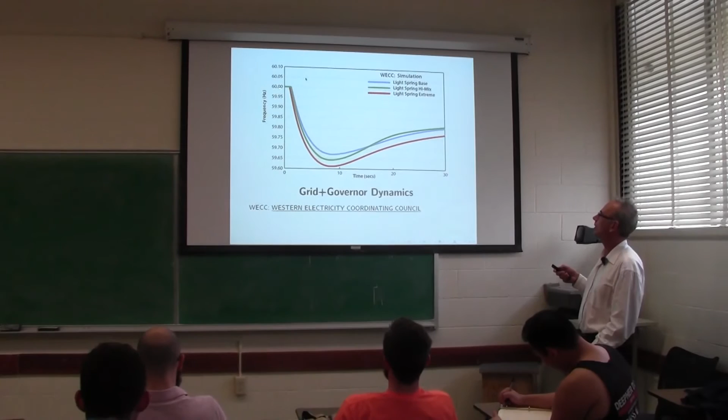And I said, I don't remember what WECC is. I'll look it up for you next time. The Western Electricity Coordinating Council. And I won't say anything more. You can remember, underline means click, and you can read all about it. So if you have insomnia, you can go to that page and read.

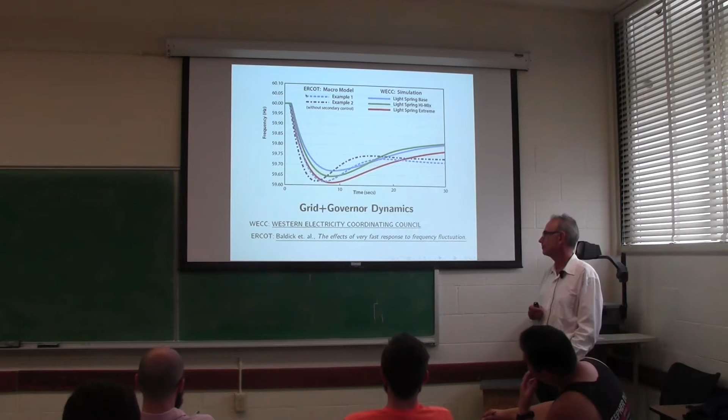And I also showed you this maybe more simplistic model of Texas that was looked at by a really nice paper by Baldick et al., on the effects of very fast response to frequency fluctuations. And it's a paper, actually it would be a good paper to look at for a report. So basically they're looking at the same sort of things I'm looking at in this lecture, given a grid model, what do I do with it in terms of dealing with, controlling the grid.

So let's do it. Okay? And you can click that again and get the paper. Let's do a design. So remember this awful thing. So for this particular paper, I pulled out one of the examples. The example is actually for this more extreme case here, where there's a very fast response time. Whether that's bad enough, we'll see. The fact that it's so lively, so underdamped, looks scary at first, but to a control engineer, we'll discuss that, whether this is a bad thing or not.

And a lot of the Midwest is under PJM. So there's one control center, where they're going and making decisions for the entire fleet, for a quarter of the U.S. And they broadcast this to every single generator. Well, there's some generators that opt out of control, but any generator that will accept a control signal from the balancing authority, that's common to every generator.

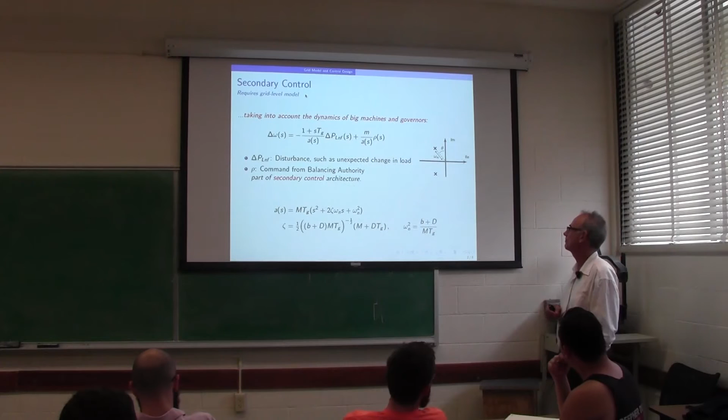And you can approximate A by a second order polynomial. So it's a second order transfer function. So what's A of S? So we derived it. Was it last? No, you were there a week ago. I can't give it to you again, but it's there.

We had B, which was the summation of the reciprocal of those droop parameters, that is the summation of 1 over Ri. And D was the constant for all of these frequency-sensitive loads. TG was the time constant for all these governors, and M was the sum of all of the inertias in the system. So we derived this, and it's very hard to see what the hell that is.

So you've got to look at a numerical example to figure out, is this less than 1? That's when you have underdamped response. Okay, so again, this is a disturbance.

The main thing we'll be talking about in the next lectures is this rho, which is a command from the balancing authority. Roberto, that was your question last time. That's going to be part of the secondary control architecture. So how do we do it?

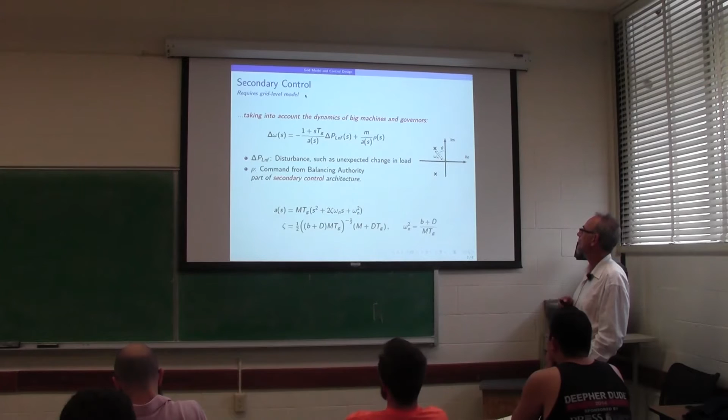Here's the example from this ERCOT study we're going to look at in detail, where they got this disturbance transfer function, and I'm just going to normalize this other transfer function. This is the transfer function from the command input to the frequency deviation, and I'm normalizing it so it has DC gain unity. I can always do that because I can always scale rho, so it's irrelevant, the exact constants.

So this is a case where the damping ratio is 0.6 and the natural frequency is the distance here. When the damping ratio is less than 1, we have this geometry, with theta being this, zeta being the sine of theta as we saw last time, and omega is the distance to the origin. That's an underdamped system, but not very underdamped, so it's not a huge overshoot if you look at it.

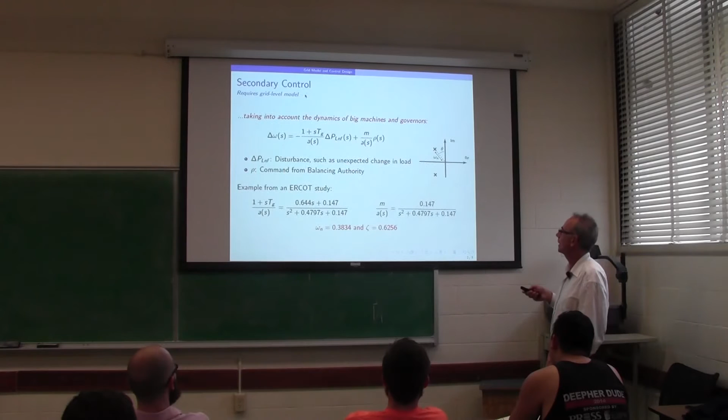And I think that's what I'll write down next. Yeah, so there it is. This is normalized, but I've basically looked at step responses. If you're going to do a control design, you look at various different portraits of the system, and one is a step response. This system has unity gain, so if you put in a step input, its steady state will be unity.

So I basically scaled the step input first to make it negative, so it's like an increase in load or a decrease in generation. I also scaled it so the steady state behavior is the same as the plot I showed you before. But you see that the response to a disturbance has this big undershoot in this case, and a step from the balancing authority doesn't, and that's because this had the zero in the left half plane, which we explained last time.

It causes that more extreme behavior. Well, this doesn't. So that's the first thing: you look at this and you say, well, it's underdamped, but not very much. It doesn't swing around or oscillate, it just comes down a bit. And that blue thing is the thing you use for design. That's all you care about when you do control design.

So the zeros for the disturbance are important, they tell you something. But in terms of getting a control design that is stable, robust to model uncertainty, rejects disturbances in a certain bandwidth, all the goals we talked about last time, it's that blue guy.

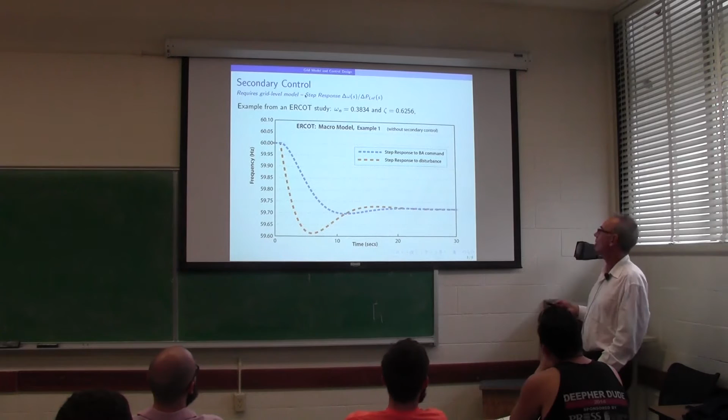Okay, so the next thing you're going to do is this: you're going to go into MATLAB and start to create transfer functions. I want the transfer function for the disturbance, defined right there. I write GPD equals transfer function, and I put in the numerator, there it is, and I put in the denominator. There's a 1, because the coefficient of S squared is 1, there's this 0.4797, and this thing here.

And there you get it. So MATLAB then immediately puts it in the same form that you would have done it in a math program. So that's really, I love you MATLAB. I mean, it's amazing what they did for us. Control, you can't imagine how awful it was to teach control when I started as an assistant professor and there was no computing technology.

There's nothing, you know, you really couldn't tell the difference. You had black boxes, and nobody could tell what was a compensator and what was a plant. And having this is just heaven. So anyway, you do the same thing for the thing you really care about.

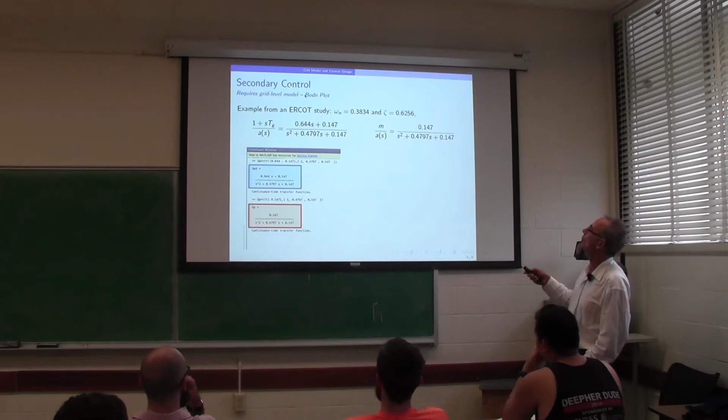Again, this is the transfer function from the balancing authority's command to frequency deviation, and you get these guys, and then you can look at a Bode plot, because that is it. You need to understand a Bode plot for design. Forget anyone in power systems who goes on and on about pole zero plots. For a single input, single output system, it's crazy to look at pole zero plots. And power systems engineers do not know that. They really don't. I've been around them long enough to see they get a different education than people in other disciplines. And here's why.

So basically, you're going to type Bode GP and Bode GPD. There's a hold there that's missing. Figure, then type hold to get two plots on the same page. And you see this resonance up here for the blue guy. The blue guy is the one with the zero, so the zero creates that response. And for this other guy, you see it's more flat, you don't see resonance. And that's the thing you have to stare at when you do design.

Now, why do I dismiss pole zero plots? Because when I look at this, it could be a 5 million order system, with 5 million trillion poles and zeros, but yet I wouldn't give a damn. I could do a design. The complexity of my control design has nothing to do with the complexity of the system. If I do a control design based on poles and zeros, I'm dead if this is complex. I'm completely dead, I don't have any intuition. And the intuition you get from the Bode plot is infinite, while the intuition you get from poles and zeros is really fragile. It's just not useful at all.

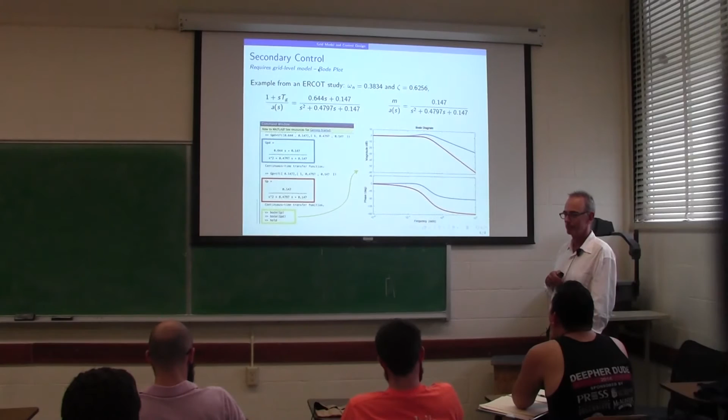So anybody who's not taking control, you're allowed to whine. Tell me to slow down if I need to. Yeah? I want to whine? That's fine so far. Okay, cool.

So here's where I sit down and get to work. First of all, I write down a Bode plot, and I gave myself a lot of room, partly because there'll be a lot of these. We're going to come back to this plot a lot over the next weeks, so it's going to be really useful to illustrate a lot of concepts.

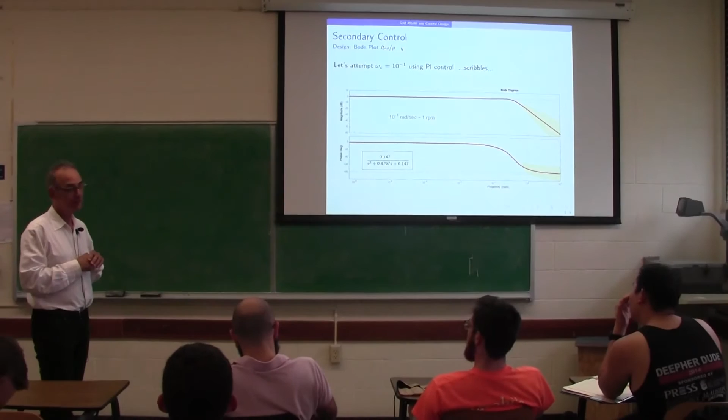But last lecture, I designed a PI compensator, and I ended up designing it so I would have good disturbance rejection over here and basically nowhere else. I had high gain at frequencies down here, but not elsewhere. So we want high gain. The larger the region we have high gain in our compensator, the broader the range we'll have disturbance rejection.

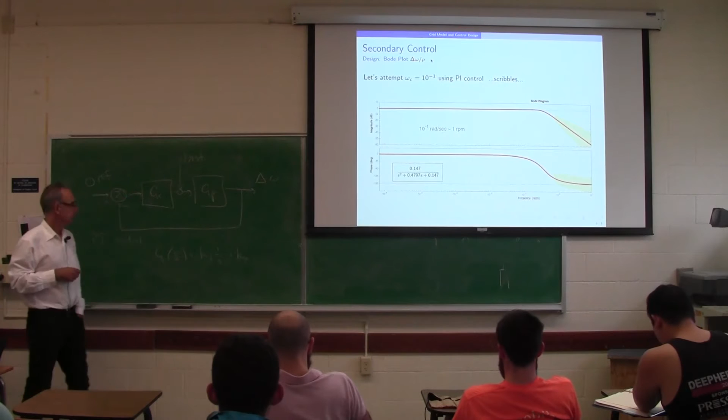So PI control just means, not JWS, it means you have a positive gain times 1 over S. 1 over S corresponds to integration, and then a proportional gain as well. And this is big at DC. When S equals 0, that's DC, and this is infinity. So you get very high gain at DC, and the gain tapers off, because when the frequencies get larger, S is J omega, this thing decays linearly down to 0 on a Bode plot.

So anyway, the first thing you do when you do a control design is you somehow get a Bode plot, and you might do it empirically. You might put sine waves into the system. So I'm the balancing authority, and I'm saying, hey, grid operators, I'm doing a test.

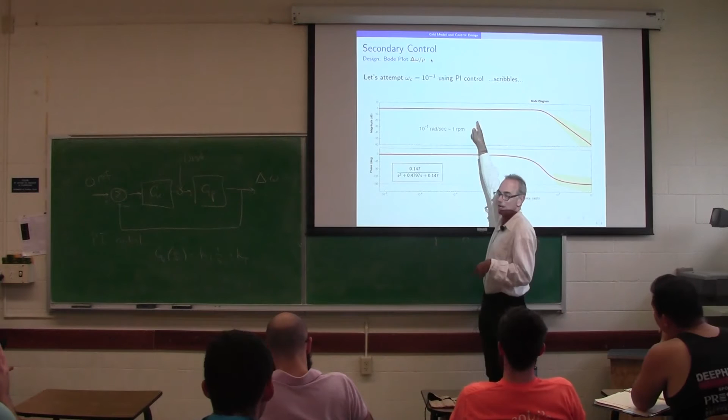I'm going to put in a sine wave of this frequency, then step up the frequency, step it up again, watch the response on the grid, and get a point for phase and magnitude. Do that for several frequencies. You do that in all sorts of applications. I'm not saying they do, but they might.

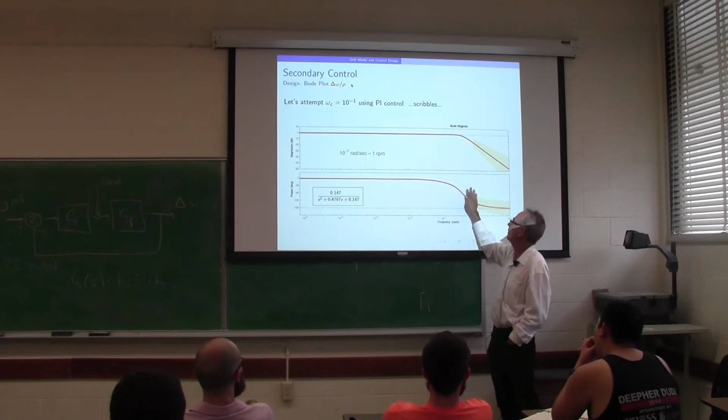After you do that, you'll look at a region like this where you don't know anything. Actually for something like ERCOT, it's bigger than this—a big region where you have a lot of uncertainty in terms of phase and gain. So you've got to identify that, and you don't want high gain there, because if you don't know much about the system, you want to suppress its behavior.

Because I know it's 0, if I multiply this by 0, then it's known. So in this region here I have to worry. Here, take a look, I know that—0 dBs and some constant. I wrote 0 there, whatever it is. That's known, so I can mess around there.

So in a control design, once I understand the system, I'll blast up the gain there and shove down the gain there, and walk away home until I do an experiment—if it didn't work because I forgot about something. But anyway, this is a first step.

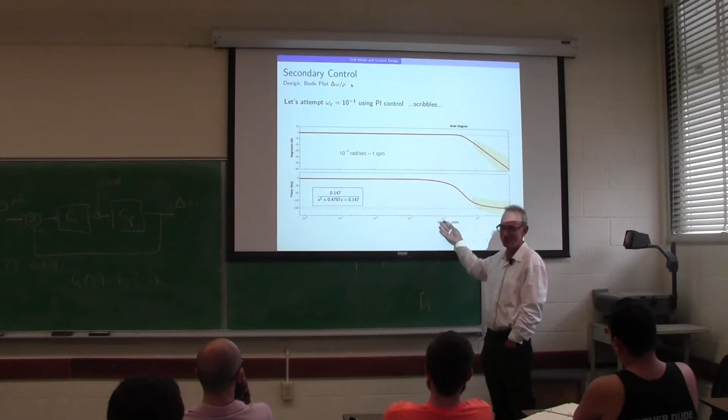So, I'm scared. I didn't want to do that. All right, so let's do this. Let's do a design.

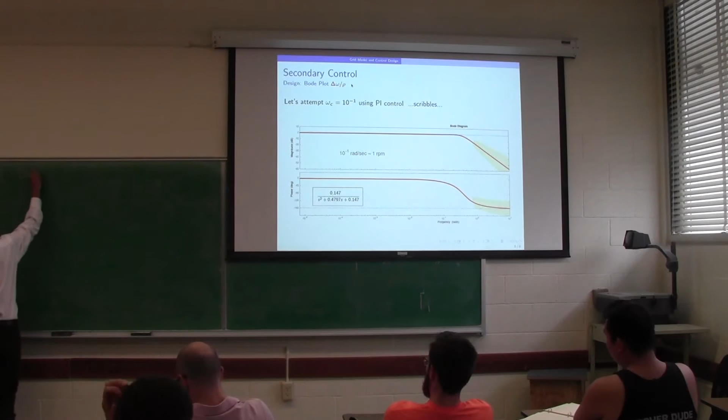Okay, I'm just writing down what I wrote before, and I want to write down a Bode plot of a PI compensator.

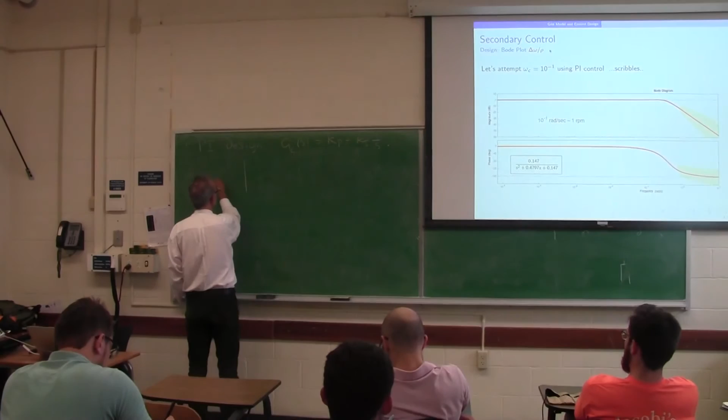Okay, so it shoots down linearly. I said this last time, but it's worth saying twice: for when s, which is j omega, is very small, this thing is huge—it completely dominates, and you're basically looking at just the integral term. A Bode plot of 1 over s is just minus a Bode plot of s; it goes down linearly, minus 20 dBs per decade.

If you don't know what that means, don't worry about it. At some point it flattens out, and that point is a zero location—when this is equal to 0. You have to rationalize this, and that's minus kI over kp, I think, with s on the top and bottom.

It's when this thing is 0. I'll let you work it out—if I'm wrong, don't tell me, I don't care, it doesn't matter. There's a place where that transfer function is 0, and there it is. I know that's right. Okay, so that's a Bode plot.

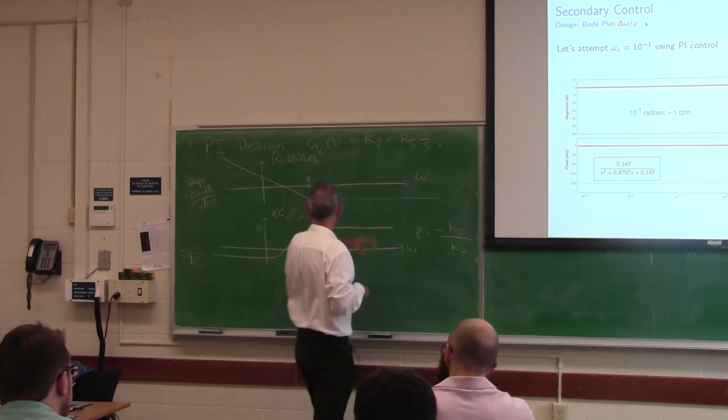And the scary thing about PI compensators is right here: this dividing by s—forget the kp for a moment—when 1 over j omega is just minus j over omega, that's why the phase of minus j is minus 90 degrees. That's why you get that. Phase lag is what we worry about; phase lag is like delay.

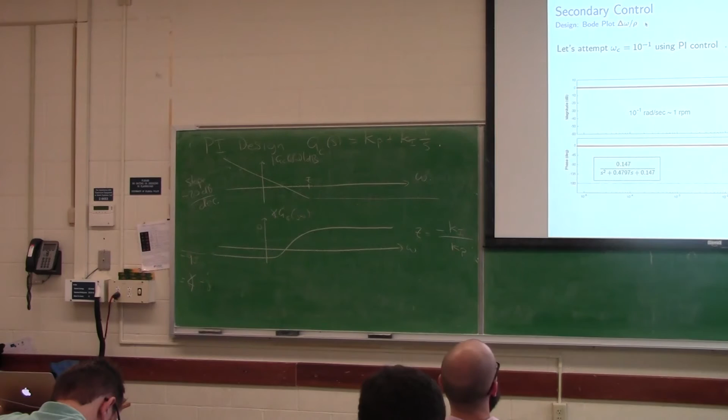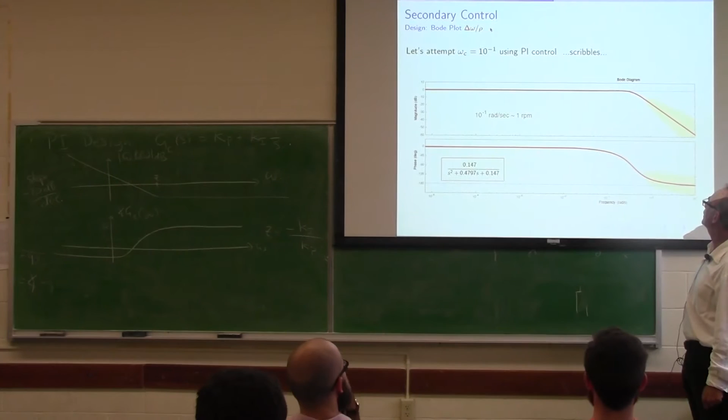So that's where the phase lag here is unfortunate. We don't want this zero to interfere, we don't want this phase lag to get us into trouble possibly over here—unless we've suppressed this enough that it doesn't matter. So it depends on your design. Let's just do a conservative design: if you suppress that enough, you'd still have the phase lag, but it wouldn't have enough of an effect on your system.

Well, we can make this really precise. So it's that thing—well, we'll have to go. I'm going to go back and review phase and gain margins in a moment.

So another thing is that we're going to presume we have a stable system to begin with. As I discussed last time, as we slowly perturb the system, the stability remains—stability is a continuous operation. So if I have a Bode plot and I perturb it a little bit, the system is still stable. I said this last time, but I'll do it again.

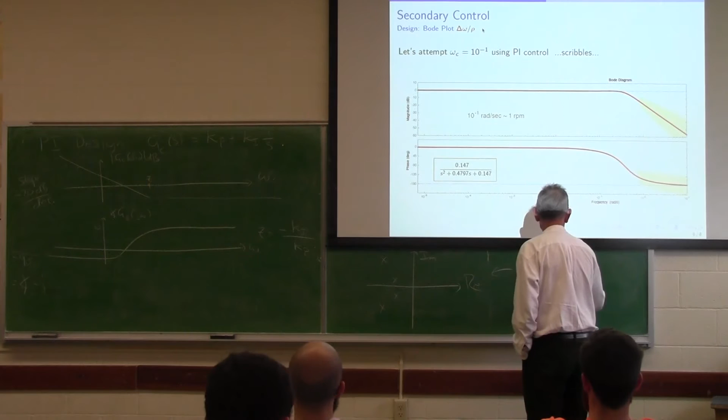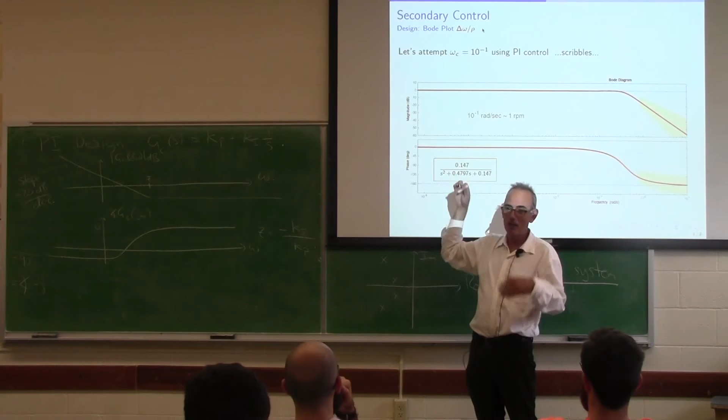So stable means my poles are in the left-half plane for the overall system—for the feedback loop, that's what we need for stability. Now, as I perturb this Bode plot through design, I'm going to add a PI compensator and move this Bode plot around. The closed-loop poles will move and change around. As I crank up some gain or move some parameter, the poles will move slowly, continuously, and the very first time I get into trouble, I'll have poles on the imaginary axis.

Because the poles move continuously, that's why the imaginary axis is so important. It's a boundary between stability and instability. So I want to make sure my poles are far away from the imaginary axis, and I'll review how we think about that in a moment.

So I'm only going to do one design. I'm going to do a really conservative design. First I'm going to note that 10 to the minus 1 radians per second.

I was playing around with this last night, trying to get some intuition for it. It's one cycle, one round per minute, so it takes a minute for one cycle. It's a sine wave that has a period of 1 minute. Now that's pretty much like the highest frequencies that the balancing authority cares about.

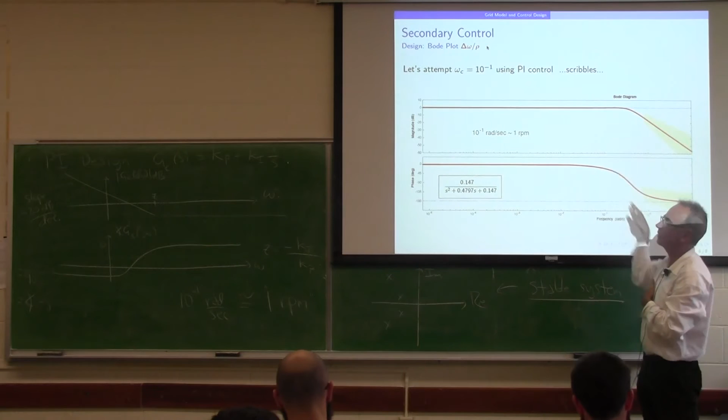Well, it's already going low, but I can get away with murder. I could just use an integral control. Make it easier on myself. And it's got what's called a crossover frequency for all values of the gain, it looks like. Here's the control design.

Well, actually, it's a second design. I did some crappy design last time. This is a little better. It's not great, but a bit better.

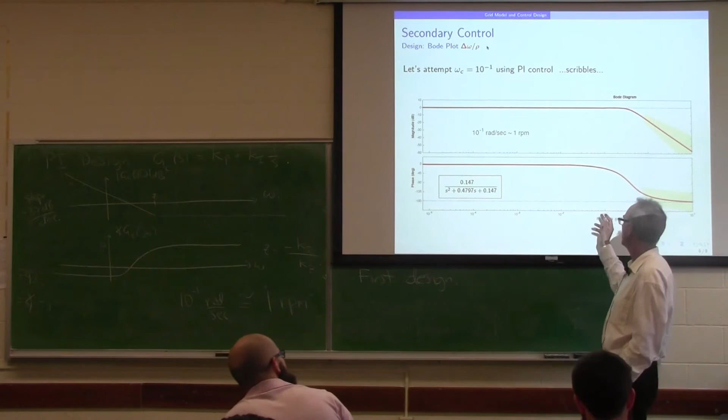So my first design is I'm going to set the crossover frequency to that value. I'll remind you what that is in a moment, okay? And make sure that I have reasonable phase and gain margins, and I'll define that as well.

So to remind you of what these things mean, I've got one, two, three bits of jargon there. I'm going to have to go through, and I need pictures. I can't do this by definition, I can do this on the blackboard. But the main idea is this: I'm going to get rid of the phase for a moment.

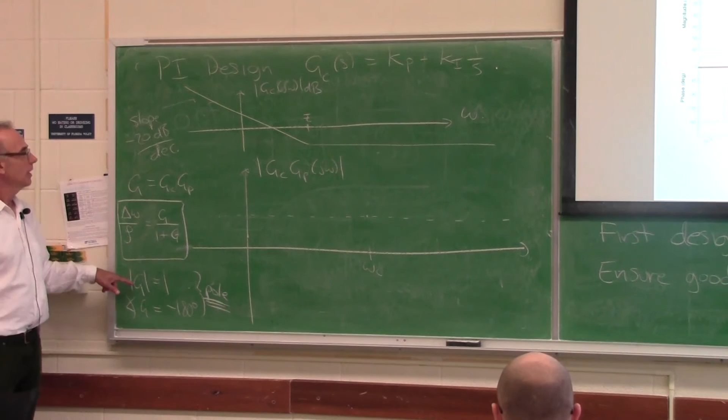And those are the two things you see in a Bode plot. You can see that's the absolute magnitude, not in dBs. In dBs that means 0. So you look at this value of 0. That's a crucial point, because if the magnitude is 1 or 0 in dBs, and you find that the phase is -180, you have a pretty bad design.

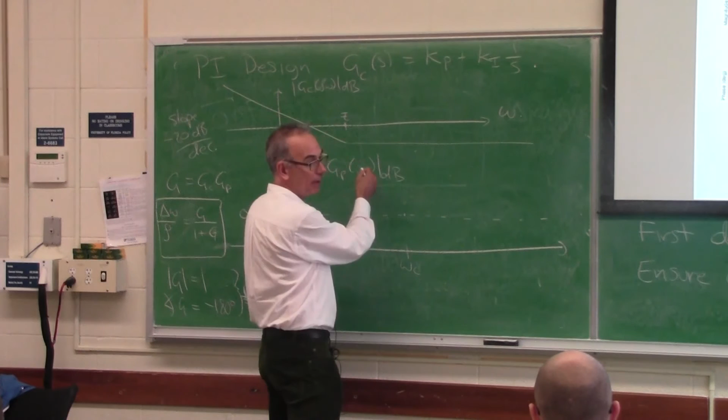All right, so anyway, any design is going to look like that. Any design. So if somebody has done a control design and you want to ask them, what's your Bode plot of the open loop system? It's called a loop transfer function. Once you've told your crossover frequency, there's a Bode plot. I designed it that way. I designed it so it's unity gain here, which means 0 dB, and I decided it goes down. Do you all know why it goes down?

It was our original control objective. High gain. Yeah, okay. I mean, we know over here we're going to have high gain. So I could fill in that Bode plot too: high gain over here, and lower, or moderate gain over here.

So you could say, well, why not have it go down and come up again? Well, then I get another crossover frequency. I want one crossover frequency, because here's where the danger lies. I can get into real problems with stability if I don't have things really under control here.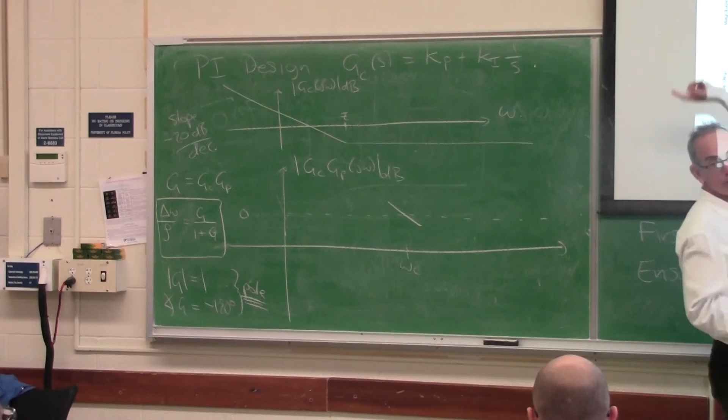And so the original system, we know that the plant is flat. The gain is just flat for low frequencies. And I know that this thing has just a linear slope. So you can guess that my design is just going to keep going. So there it is, you know what I mean?

And at some point, what's that? Slope also negative 20 dB per decade. Yeah, the same slope, right? Because when you multiply transfer functions together and you look at the magnitude in dBs, you sum the Bode plots.

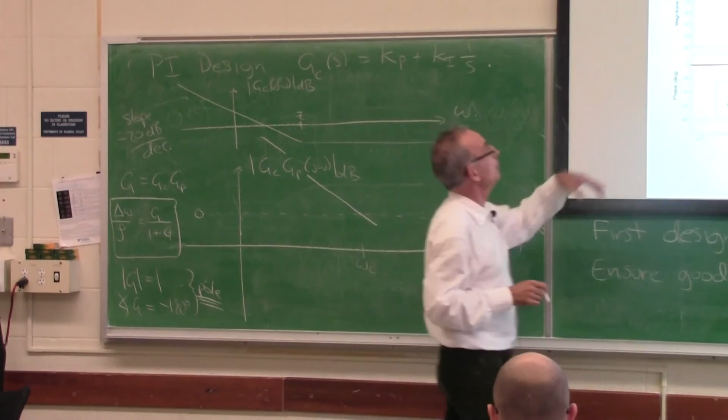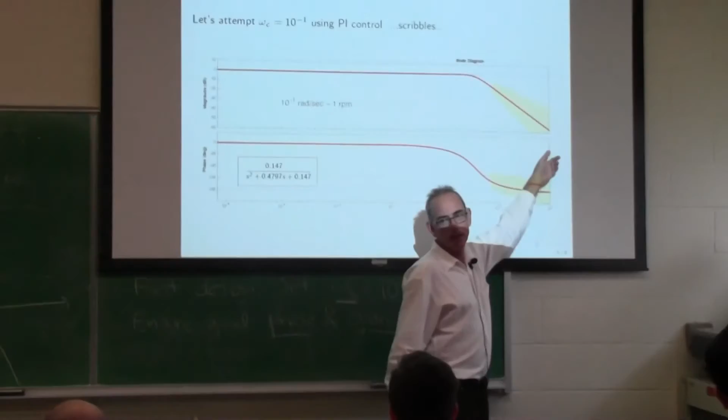And this thing has been normalized to be 0. It's a constant. So all we're seeing for low frequencies is the compensator, which has a slope of minus 20 dBs per decade. Right? Cool? All right. Okay, and then, when you look at this, well, it's going to go down further at some point because the plant does. Well, it looks like maybe we can just get away with murder. Let's just use integral control. Let's forget about the zero altogether and try it out.

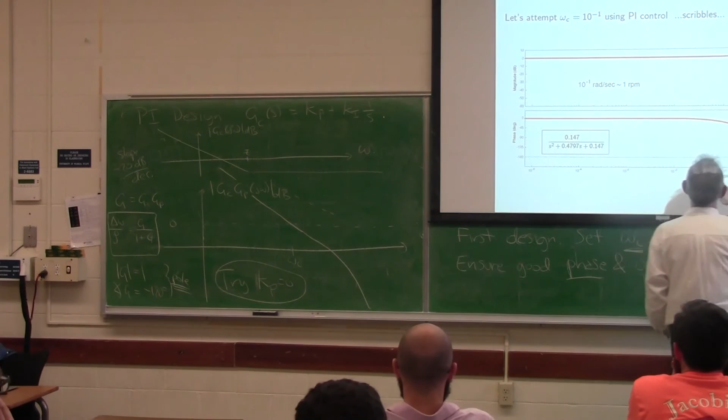It's the first step, okay? So it makes things easier. If we just forget about that, because it looks like with this design we can get away with it. We're going to introduce 90 degrees of phase lag, right? That's what I told you. I told you that the frequency plot is minus 90 degrees. But is that going to be so bad? I mean, we're...

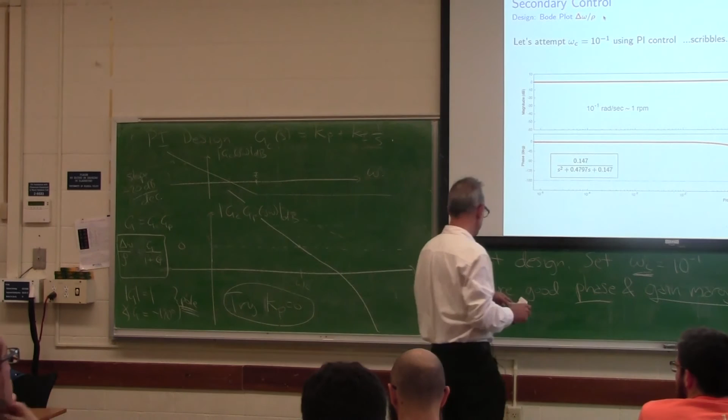Zero there for the product. So we're going to set this. This will check through plots in a moment. I'll define what phase and gain margin is in plots in a moment. But we need...

Okay, so we need the product to have zero in dBs. We need the product to have zero, unity gain at the crossover frequency. Again, I chose this example so that it would be easy. The plant already has unity gain at that frequency. I'll put an approximation there. It's maybe not exactly true, but... And again, through this very, very simple controller, it's just Ki over s.

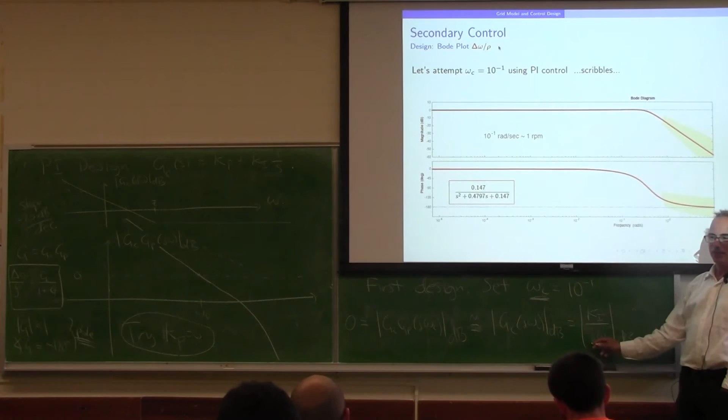Well, guess what? The magnitude of J is unity. That doesn't matter. And so I want Ki to be equal to omega C. Done. So there it is. There's our design.

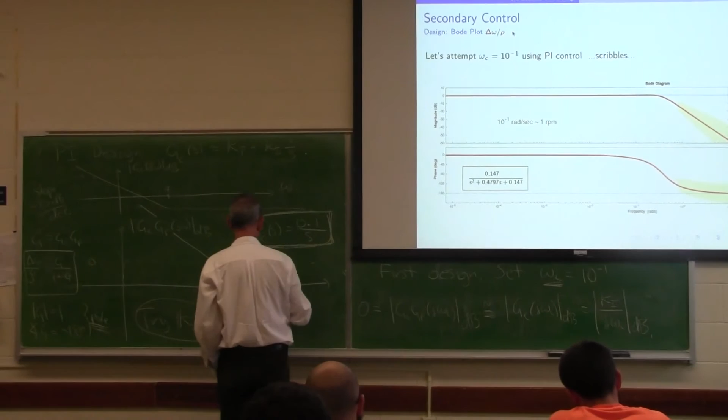All right, let's analyze it. Let's go to MATLAB and type in numbers and see what happens. Is that clear? All right, my only objective is to make sure that I have set the crossover frequency as desired. And when you look at this, obviously these two things have to be the same. So it makes it really easy. Questions?

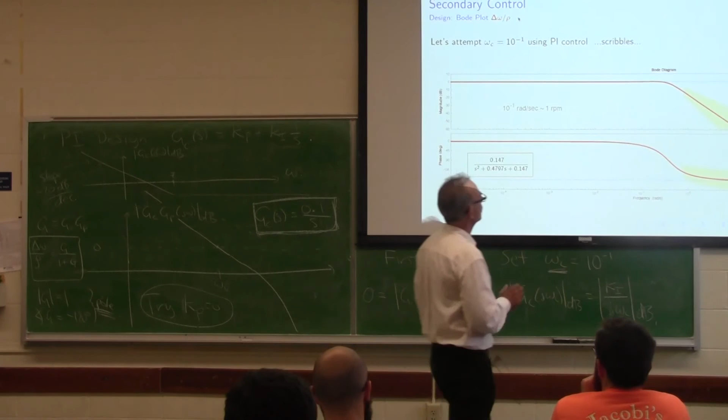How did you make this approximation? Well, it's actually, if you look at this right here, we're looking at omega equals 0.1, right? And just check it out. If I go up and look at that, that's 0 dBs already, which means unity. Okay, so this is 1 already. Yeah, you derived that from the plot. Just from the plot. Yeah, absolutely.

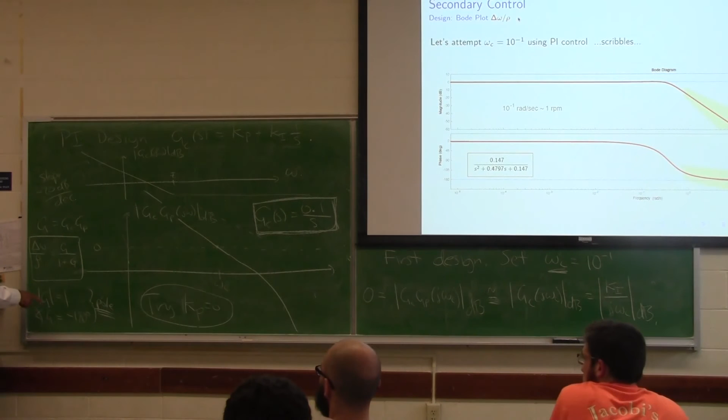All right. So there's the design. As I told you, we've done some damage to the phase because I just use integral control. I'm adding negative 90 degrees everywhere, and so the phase, which was going down to minus 180, now goes to minus 270.

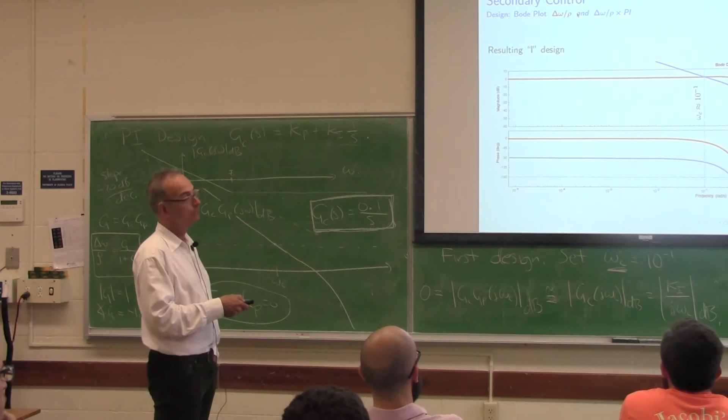But I also, this is my plant. I also added on a straight line. The fact that it's integral control means this just keeps going down forever. So I've suppressed higher frequencies even more. So while before the gain was going down considerably, now it's shooting down much faster. So where that uncertainty lies, it's been flattened to death. 20 dBs isn't that much, but at least it's small. Okay, so that's what it looks like in the blue curve. Again, this is my design. It's the transfer function from balancing authority to frequency deviation times my PI, actually just I controller.

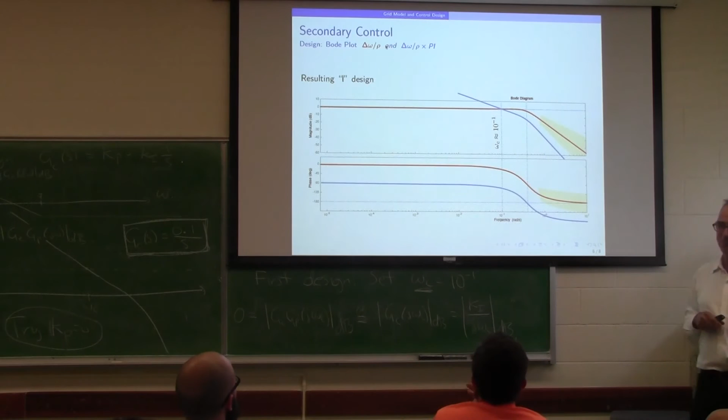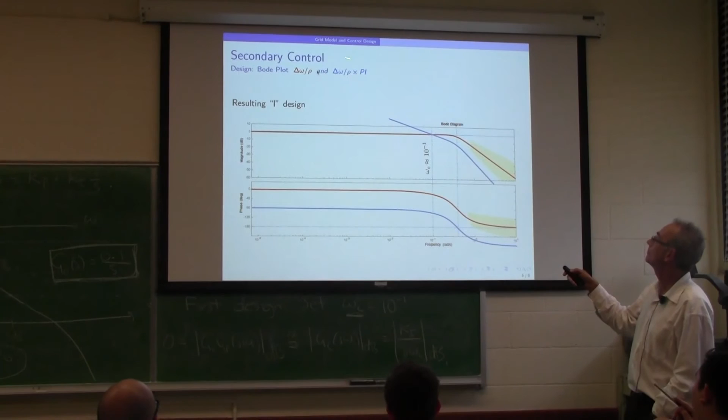All right. What you really do is this. Can you go back to that? Yeah, so the blue line is your design, right? Yeah. So why is the approximate phase at negative 90? Remember, I've erased it now, but remember for the integral controller, we had this: the magnitude was decreasing, but the phase was minus 90.

The PI control, the PI compensator, the PI compensator has this. PI compensator is a flat minus 90 forever, if it's just I, if it's just integral control.

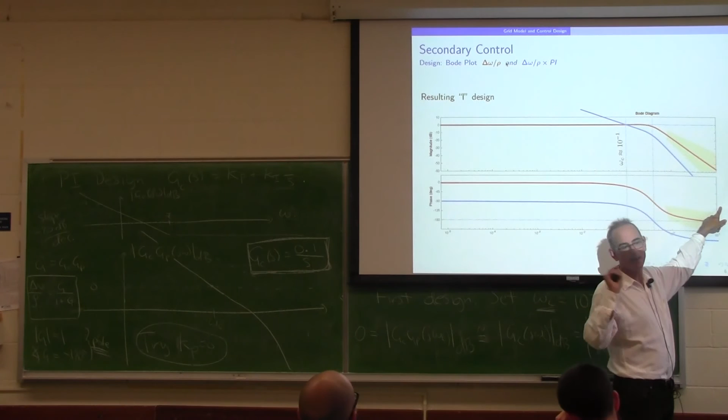So how did you calculate the dip? Is that just from MATLAB? Okay, in fact, I'm going to show you the commands in a moment. Yeah, so Bode in MATLAB gives this to you. So then between the... but this is just a constant offset. I could have done this just with an arts program by moving it down 90 degrees, because I'm just... yeah. But okay, so then in the region for the magnitude, the slope of that's also...

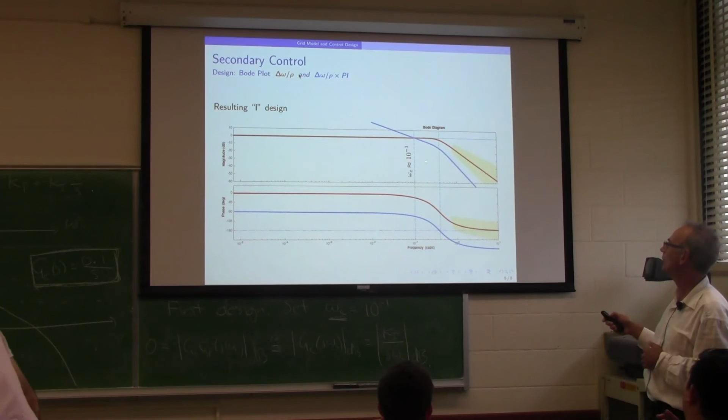Oh, no, I understand that part. Because you want to lower the gain for the uncertainty. But between the region, between the dotted lines, that's... Well, I can explain that in a moment. No, between the... well, that's because it's... this is just you take a...

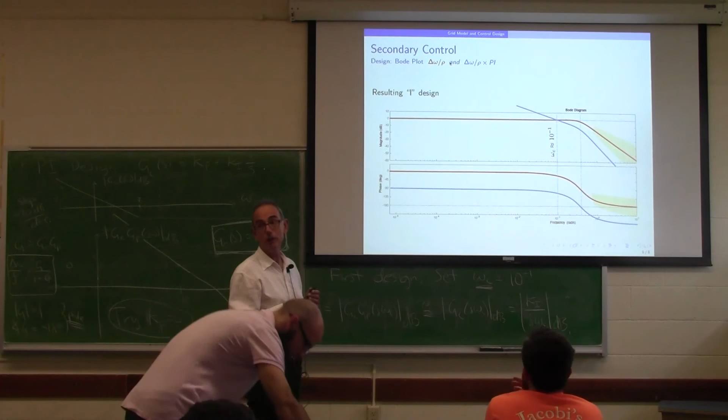When you add on this Bode plot, which is just a straight line minus 20 dBs per decade, and you add that to the red curve, you get the blue curve. The blue is the product of the two transfer functions. The blue is G.

The beauty of dBs is you add the Bode plots. So if I take this red curve and add a straight line, I get something with slope minus 20 dBs per decade there. And out here it's minus 60 because the plant itself already had minus 40 dBs per decade. So the slope of that line up to that point is negative 20 dBs, then it goes down minus 20 dBs. Something funky happens here, and eventually it goes down minus 60 dBs because you've got 3 poles and no zeros.

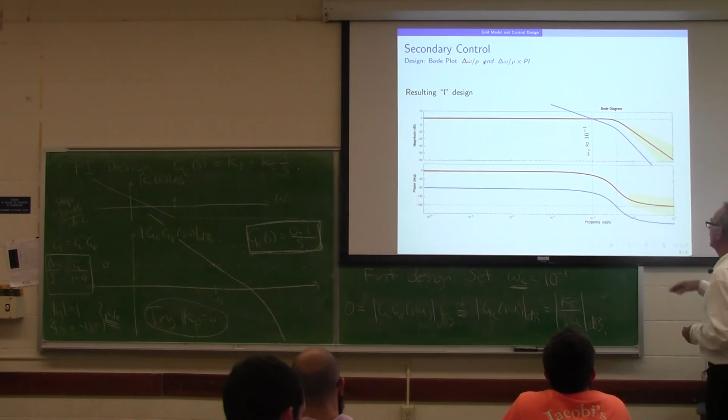And if I'd used PI, the phase would have eventually recovered here, and the slopes would have been the same at high frequencies. But I don't care about super high frequencies anyway. To me, minus 80, minus 60 dBs, that's 0. In my world, that's 0. Not to a physicist, but to a control engineer, that's 0.

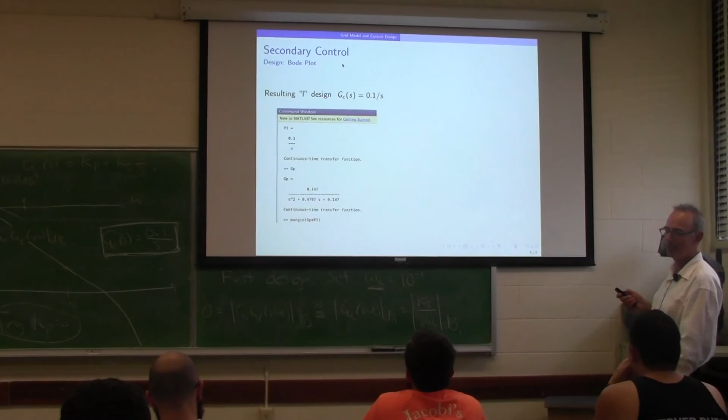Okay, so here's what you do in MATLAB. You go in, and you'll see some funny things. You can look inside my life last night if you stare at these screenshots carefully.

Not this one, but I did the same thing. Designed the PI compensator. We already defined the plant transfer function, and then you can type margin in MATLAB.

So margin is a really useful command. You type margin, and you get what I just showed you. But now let's slow down on this, it's really important. First of all, 10 to the minus 1, that was my crossover frequency that I designed. You can see MATLAB agrees. MATLAB says, good job.

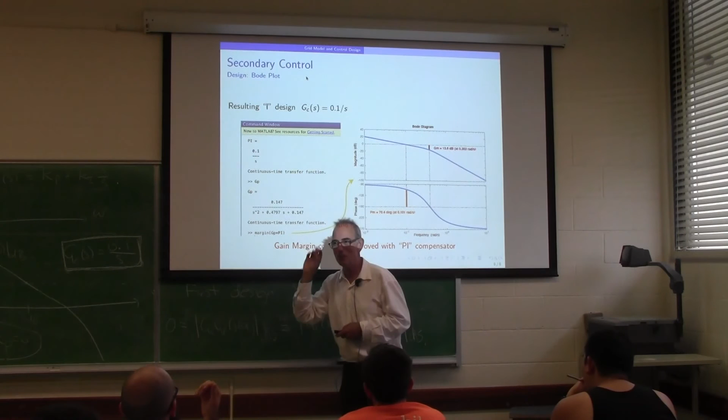It's telling me, well, I was off by a bit. It's telling me the crossover frequency is at 0.101. This is just... wait, so what is this margin value? The dashed line that MATLAB gives you from this command is the crossover frequency, and you can see that I'm off a little bit because I had an approximation right there. This wasn't exactly unity. I was off by 10 to the minus 3, but big deal.

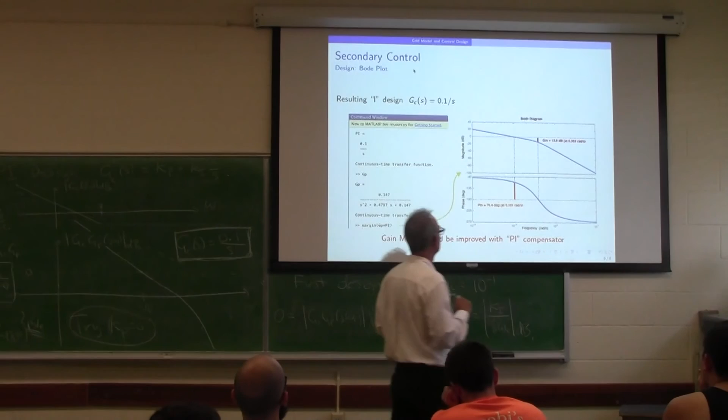Now the phase margin is how far I am away from this scary minus 180. If this thing wasn't there, I'd have a pole exactly on the imaginary axis at this frequency, because I would have phase minus 180 and a gain of 1 at a value j omega. That's bad, I've got a pole on the imaginary axis. So this is very nice, it says what I said I was going to do. I made sure I had a really big phase margin.

So how does it know to check it at 0.101 radians? It checks where the gain is unity. That's the definition of phase margin: you look at your loop transfer function G, you look at where it's magnitude 0 dBs, and you check the phase, and see how far you are away from minus 180. The farther you are, it's a big measure of robustness.

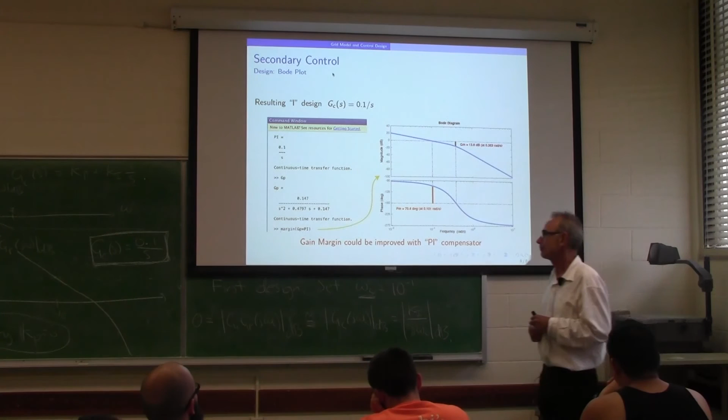But it's a lopsided view, because this is also important: you look at the frequency where the phase is minus 180. The margin command does that as well. It goes over and says there's a frequency where the phase is minus 180, and it turns out to be at 0.383 radians per second.

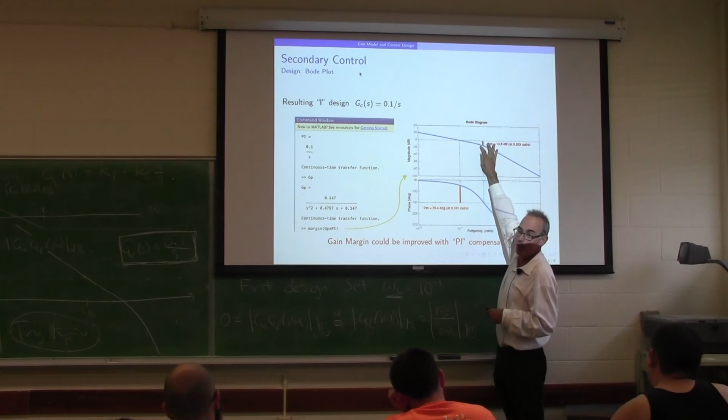And then it goes up and says, how far am I away from being 0 dBs? And unfortunately, 13 is okay, 13 dBs is the distance, but not as good as I'd like. I don't know what 13 dBs is exactly, maybe 7. So if I cranked up my gain by 7, maybe it's a bit less than that.

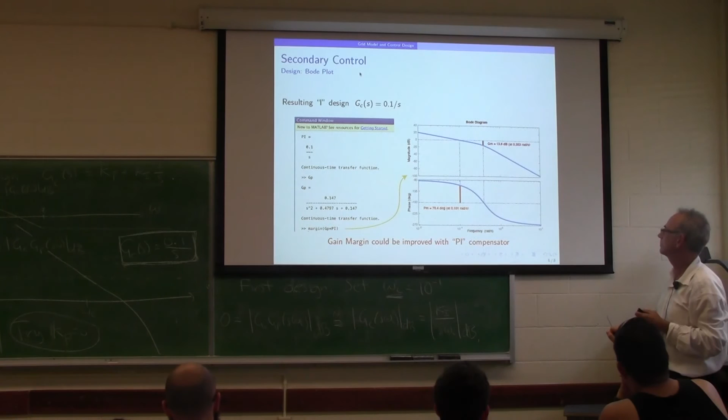We'll see. Do you want like a gain close to 0 or close to 1? No, what do you mean by that? You want to keep... here's the gain, I mean the gain is, what do you mean? It's saying at that frequency, the gain margin is 13.6, but you want the gain margin to be as close to 0 as possible. No, infinity.

Now, remember what we're talking about. Here's my closed loop system. Oh, you want it smaller. Yeah, and a pole is when G equals minus 1, so magnitude is 1 or 0 dBs, and the phase is 180. I sure as hell don't want a pole on the imaginary axis.

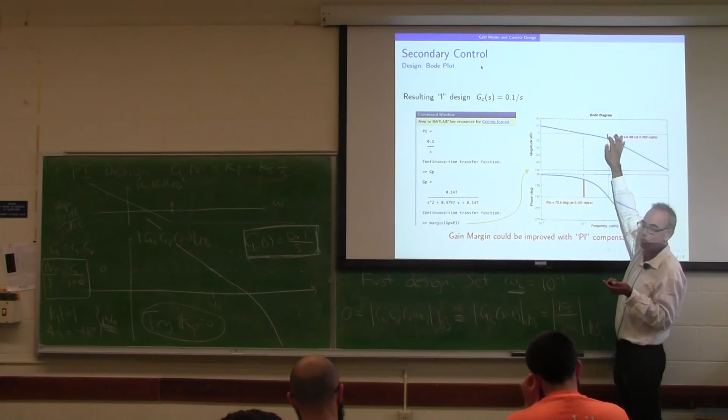And the farther, I want my poles to be far from the imaginary axis. At negative 180, you want it as big as possible. I want this to be far. So this says I could perturb the system a little bit—I mean, 13 dBs is not small, but I could perturb it a bit and get a pole exactly on the imaginary axis. If I perturb it a bit more, I get poles in the right half plane. So no matter what, it's unstable. That's my margin to uncertainty there, and I don't like it.

And I think the book's wrong. I don't believe that they just use integral control. I just don't believe it. I've tried—I have friends at ISOs. They won't talk. It's so hard to talk to people in the control room, because there's a lot of 'their daddy did it.' There's sort of dogma passed down, and there's a lot of hacks that go on. So people don't really want to talk. It's hard to get to the inside.

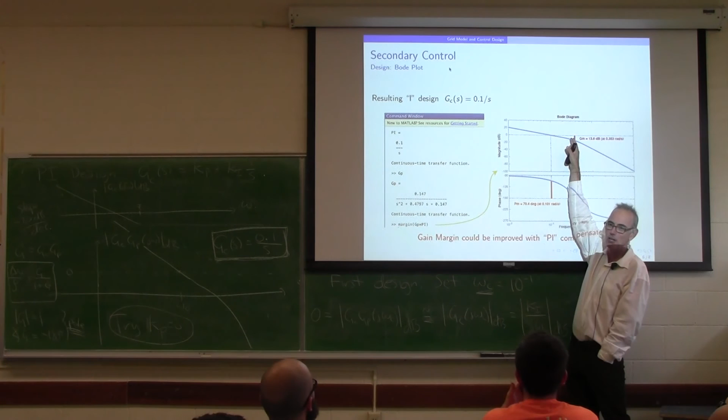So anyway, I think that if I was actually put to work on this, I probably would use PI control, and I'd do some more things as well. I'd have to find out how much uncertainty there really is in this region, and based on that, I could refine the design and get a better gain margin, and maybe get this crossover frequency more to the right. Because as we're going to see, we don't really have enough bandwidth to make PJM happy or ERCOT.

It's actually the design does not have high enough gain at the frequencies I care about. Wouldn't you want the gain to be 1 at lower frequencies? No, I want massive gain. Oh, to the phase margin? No. So you can have the phase margin—no. Remember my goal: I want to reject disturbances. So I need GC big to reject disturbances.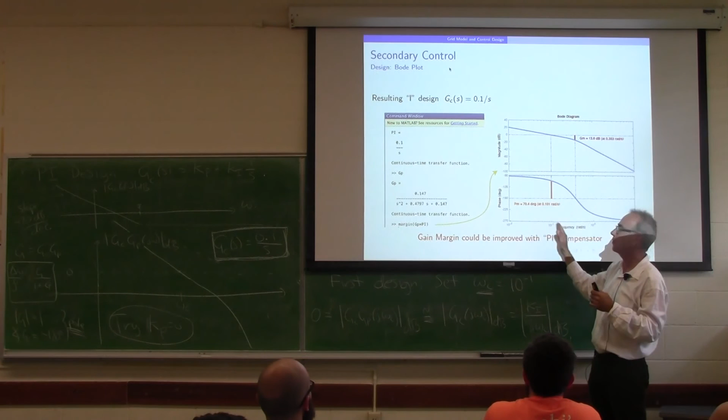So ideally, for disturbance rejection, I want that crossover frequency to be way over here to the right, if I want to reject a huge range of disturbances. If I'm completely terrified of stability, I want to move this way to the left, maybe, because then I'll have huge gain margin and phase margin. But you could be more delicate and try to shape the Bode plot to push this as far as you can while maintaining reasonable gain and phase margin. And that's a big job.

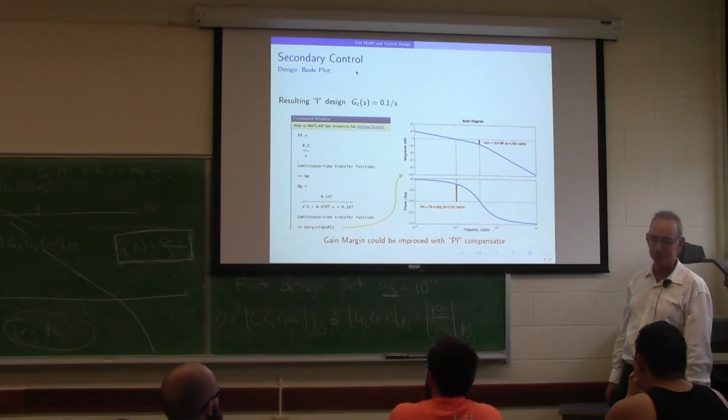You might have a fairly complicated controller. It'll probably be a combination of PI and what's called a lead controller. That's probably what I would use. But that's a control course—you'd have to take a whole course. But at least it's enough to get you ideas. Is that clear, though? We've got these two competing objectives, trying to push out disturbances but also have stability. Naturally, those are conflicting.

All right, so there's the whole thing. Here's actually what the whole diagram would look like. This is just another way of expressing what we had before. I've broken up—you notice I've got an sTg plus 1 and sTg plus 1 there. Those cancel out: the dynamics from the balancing authority to the deviation in frequency, and grid disturbance to this had that zero. So this is just a nice way of expressing everything. And we designed this compensator. The reference signal again is 0 because we would like to regulate it to 0. And we came up with this very cheap design, something you could do in 15 minutes. All right, and so those are the things we use. I'm just reminding you—so, there it is.

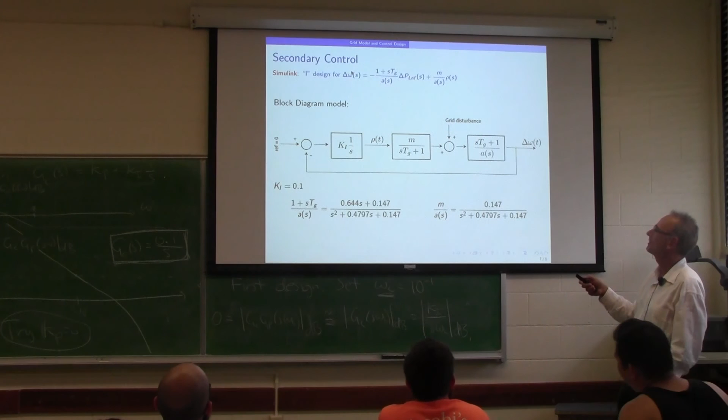I want to show you this beautiful gift from God, meaning MATLAB, called Simulink, and show you how you can play with it. So I sent you this today.

So MATLAB lets you just drag and drop transfer functions. There's the grid, there's my compensator, there's noise from nature. And you can actually get noise from nature - you can have it input samples of noise from solar or wind or whatever you like. And there's a scope and so forth.

So it takes about 10 minutes to do this. And here's where you can really start laughing at me - like, that's 10:47 p.m. last night, and my battery power looks like it's 50%.

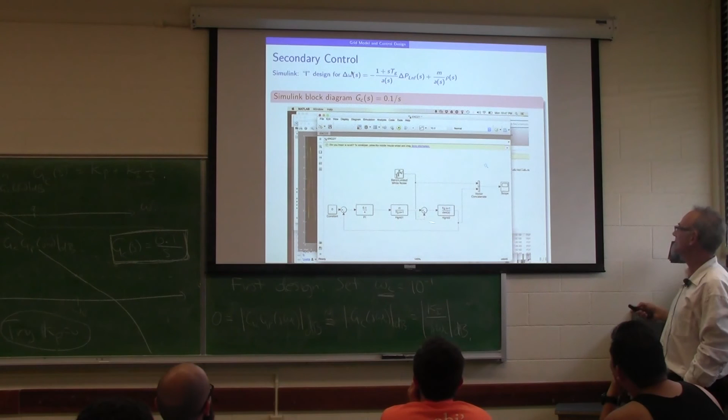All right, so there it is. And I had a lot of trouble with this because I was trying to shape the noise so it's consistent with what you would see at PJM, and I kind of failed. Anyway, this is just 10 seconds, so the variability of noise is really not that great - this is higher frequency than you'd see in real life. The red is the disturbance, and the blue is my frequency deviation. You can see I'm not doing that great a job, but I'm canceling out a lot of that red stuff, though there's still a lot of blue left over.

So what about cranking up the gain to 10? It was 0.1 - what about 10? And it goes, this is 6 seconds, it goes wham, and it just blows up. So it's totally unstable. So definitely the gain margin is less than 10.

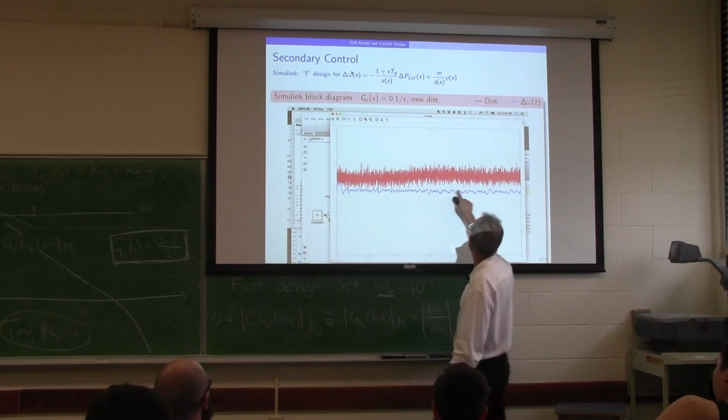Here's a more realistic experiment, not in terms of frequency content, but one of our goals was really rejecting really low frequency disturbances. Here's a disturbance with a constant value 1 included, so that could be 100 megawatts if you like, and it's positive, meaning you've got 100 megawatts of extra generation, a generator turned on and stayed on. It's not very realistic, but you see, because of the startup, you get a big transient in the frequency, but then it settles down, and you reject the DC component of the disturbance perfectly, but you're letting a lot of the high frequency stuff come in - that's about a minute and a half, 100 seconds.

That's way too much, so this design - there's not enough bandwidth in this controller. It should have a higher gain over a larger frequency range to be able to knock down the higher frequency part, right? And here's where things get really depressing.

Shall I? Oh, that's 5. That's a mistake. Oh wait, I better double check - I have to check my code. Now I'm not sure, it says 5 there, but I think it's only 0.5. I think that's a typo. I'll correct and get back to you.

I wanted to see numerically where the system would become unstable. It wasn't 5, it was 0.5. So my gain margin is only 5, or less than 5. I'll double check - this could be wrong, but you see that oscillatory behavior. We've got poles in the right half plane, but very close to the imaginary axis, so that's a bad design - a really bad design, where by increasing the gain, I end up moving the crossover frequency, and so I end up in an area with a lot of phase lag. It wouldn't be unstable if we weren't doing so much damage with integral control - we're introducing all this phase lag, which we don't need.

Doesn't 5 make sense though? Because this is in dB, right? No, because I went from 0.1 to 5. Oh yeah, 0.5 would make 0.6, something like that would make sense. Yeah, so I'm pretty sure it was 0.5. I'll go check my code.

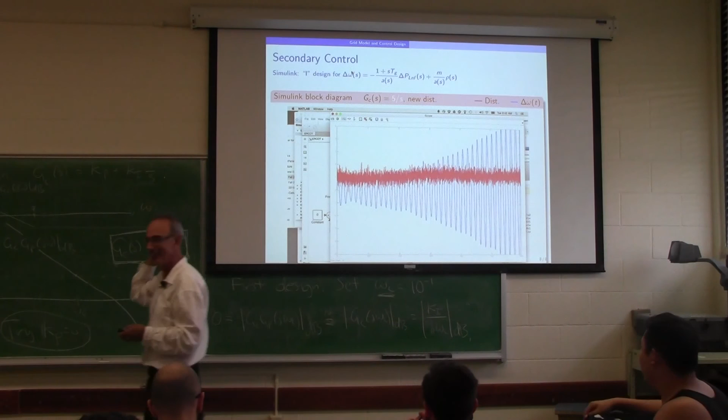But it just shows that they have a big job to do. Can you imagine how they feel in New York State, New York ISO, when the Public Utilities Commissioner, Audrey Zibelman, is saying we're going to have transactive control, and every homeowner is going to ramp up and down their power consumption in response to grid signals? These poor grid operators have dealt with this, and they're really worried about their design. Grid operators are scared to death in the US because there's so much talk about revolutionizing the grid, and yet these things happen. I can show you plots of this - I think I already have, but I'll show you again. So anyway, keep this in mind as we go forward. Control is a subtle problem.

Has control design not changed in the past 50 years then? For grid control? No, it hasn't, not at all. That's kind of disturbing. Well, no, it's just that decentralized control is hard - you can't blame the grid operators. The fact that we have a system with so much uncertainty means you've got to be conservative. So if somebody comes along and says, hey, I've got a new approach to optimal control, they'll have to ask you, well, how robust is it to uncertainty in phase and gain and so on. So it's a difficult thing.

Do you think there would be a way to normalize disturbances? What? Maybe having...